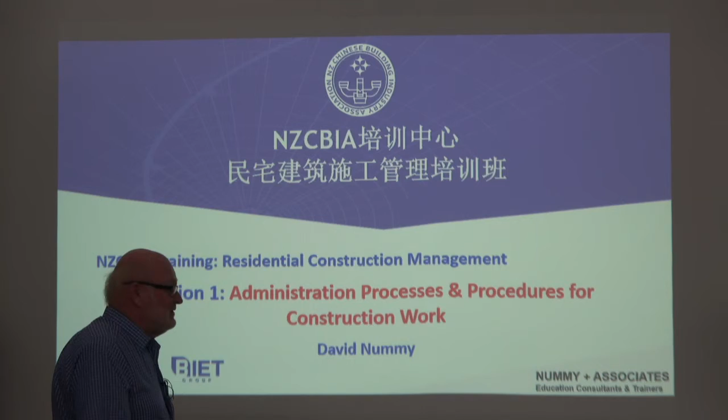So, administrative processes and procedures for construction work. These are the things that we will be going through today. We'll be looking at tendering, we'll be looking at contracts and standard conditions of contracts, the role of a schedule of quantities, and very quickly looking at some monitoring process. Those are the four key things that I will cover with you this afternoon.

I've got some terms up there already which I'm not certain whether you understand. A schedule of quantities - what does that mean? My background is an architect, Frank's an engineer, you know what those things are, you know what a builder does. Do you know what a quantity surveyor does?

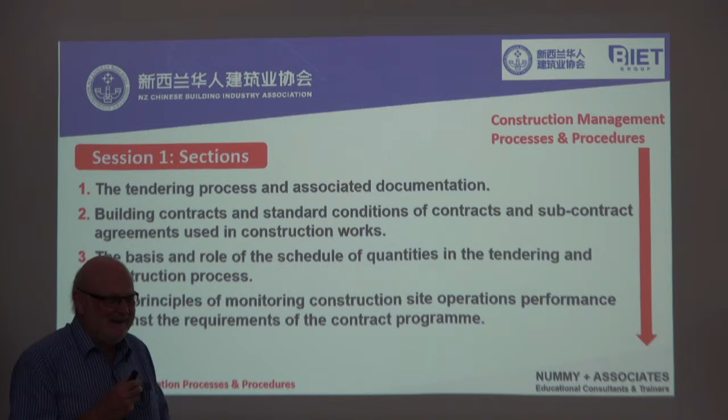Probably you do. In my role at Unitec, I used to visit schools and ask students who wants to be an architect - everyone puts up their hand. Who wants to be an engineer? Lots of people put up their hands. Who wants to be a quantity surveyor? No one puts up their hands. No one knows what a quantity surveyor does, though I know a quantity surveyor makes lots of money. But we will talk about the role of the quantity surveyor as well.

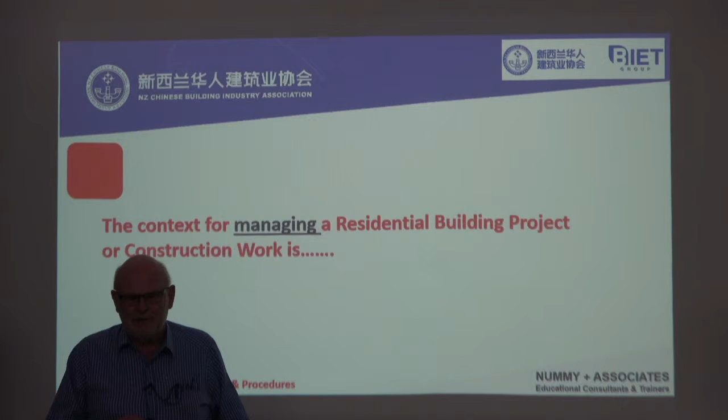So what is the context for managing a residential building project or construction work? I'm going to reinforce some of the things Frank has just said, but I'll do it slightly differently. I will talk about scope - what it is that we are building. That is at the key, at the centre of our context, the scope of work. You'll often hear people talk about the scope of work.

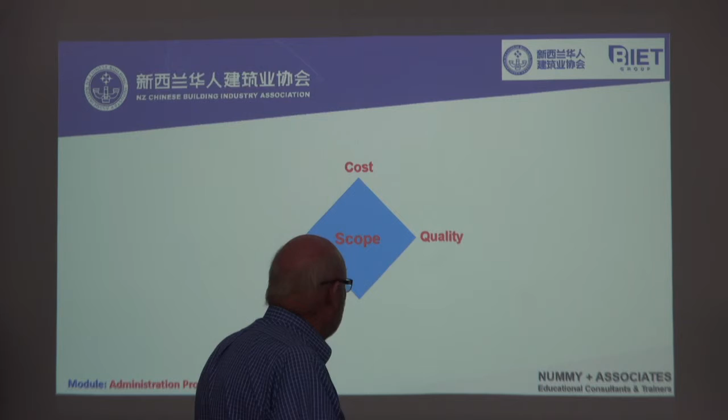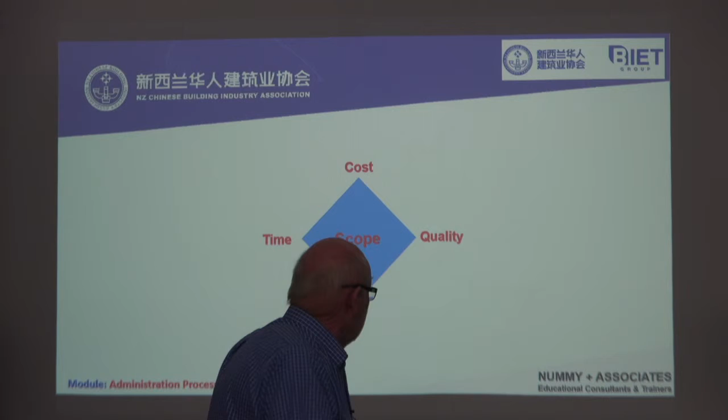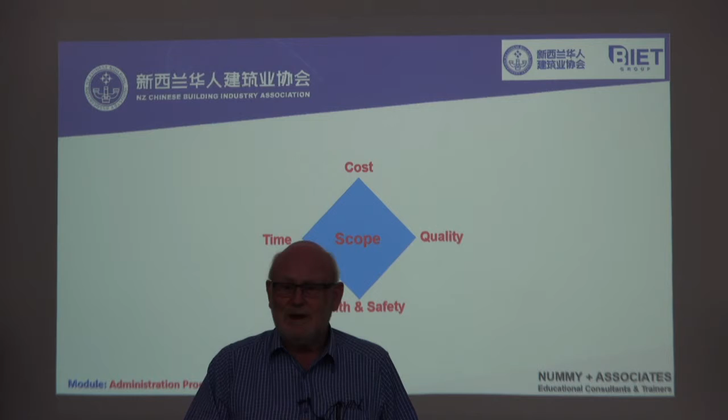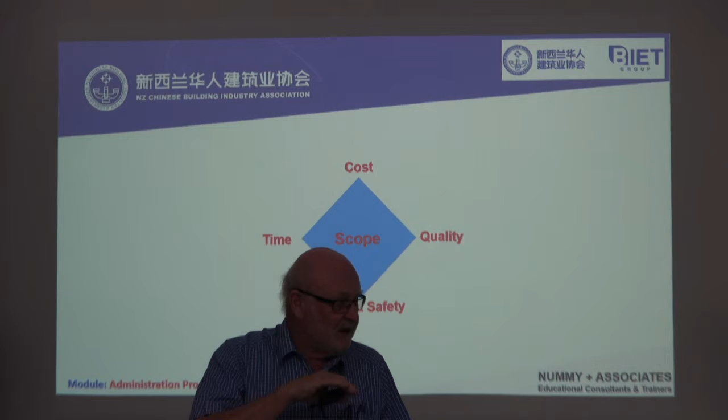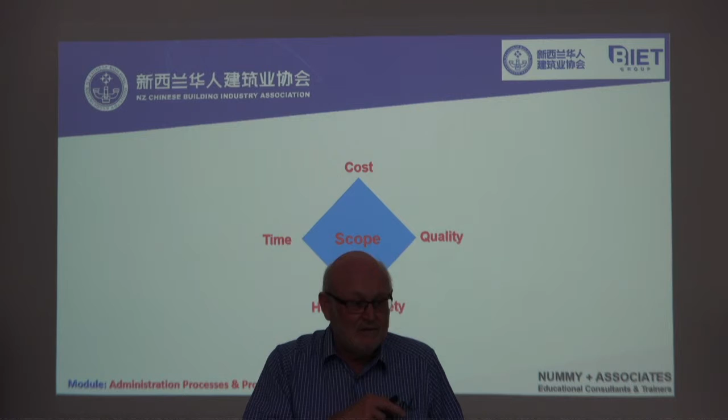Construction industry, particularly in New Zealand, is a dangerous place. Our accident rate within the construction industry is high, particularly in residential construction. In terms of workplace injury and death, the construction industry ranks with forestry and farming - in some years it is worse. New Zealand has a small population, just over 4 million people, half the size of one Chinese city. But in New Zealand, between 5 and 12 people will be killed in the construction industry every year. It's our responsibility to ensure that doesn't happen, and that we send the people who work for us home safely every day. That's a major responsibility that we have.

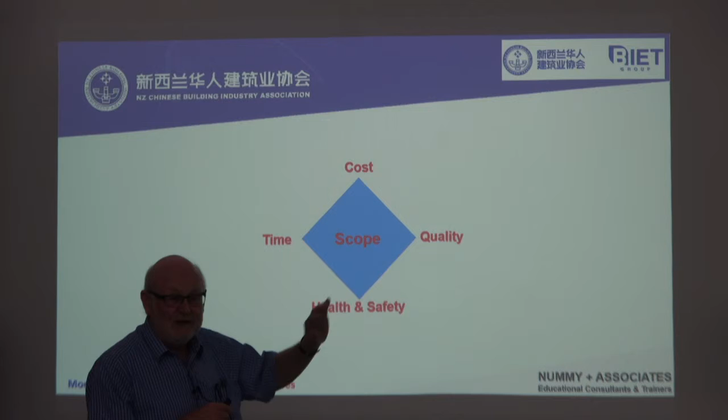So those are the 4 things we have to particularly focus on when managing construction projects: the cost, obviously, and the quality - the stated quality. When we talk about quality, it doesn't necessarily mean high quality, it means the quality that has been agreed. For example, if I bought a traditional car, a Rolls-Royce, that would be a different quality than if I bought a Toyota Corolla. They are both cars, but built to different quality standards, both built for the purpose they are manufactured for. So when we talk about quality, we're saying whatever the stated quality is that we have to achieve.

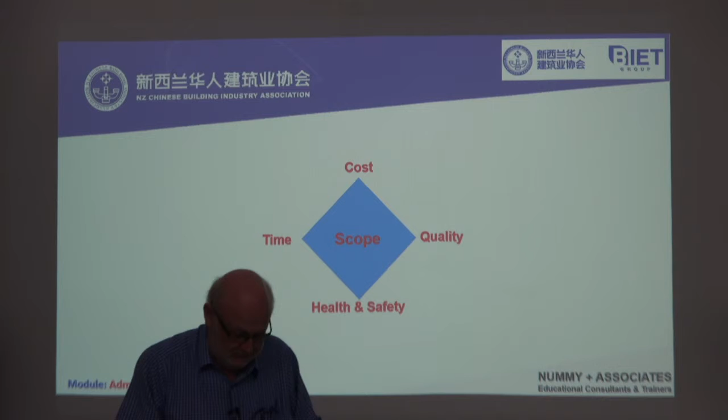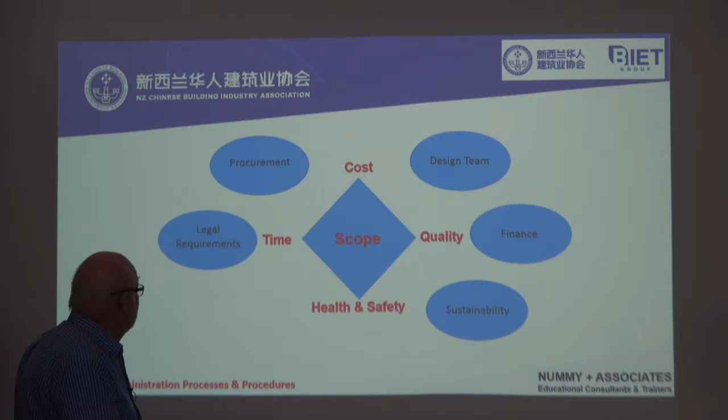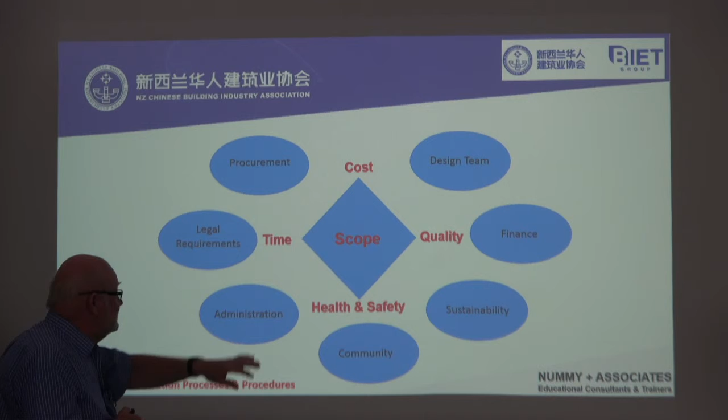Around these are the other things that impact the project - we have a design team, finance, sustainability, procurement, which is another word we'll talk about, legal requirements and administration. Those are the things that surround our project, and let's not forget the community. We don't build in isolation, so what we are doing will have an impact on our neighbours, on the community that we are in.

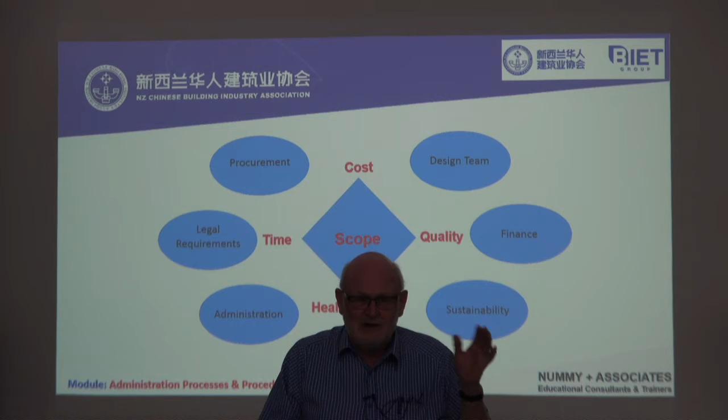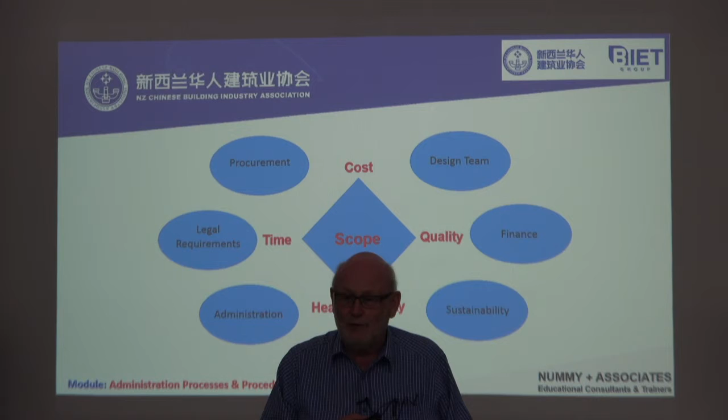And it depends on the project - it can be very, very important. For example, when Fletcher's built the latest stadium at Eden Park, there were no community complaints. They were constantly engaging with the community in the surrounding area to keep them informed, to protect their welfare, and so that the job was running smoothly.

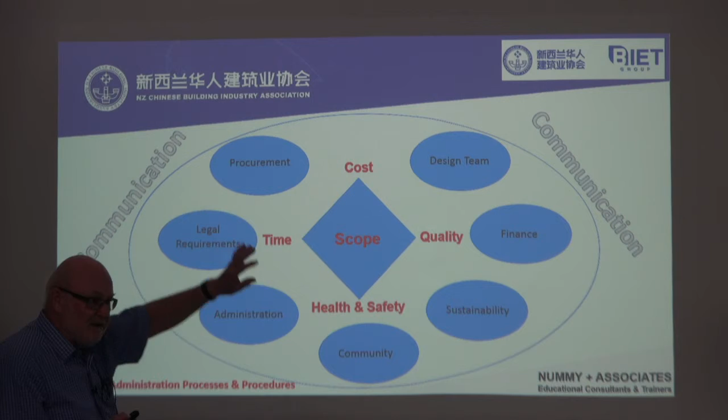And around the whole of that is good communication. So that's the context that we are working in. The scope of work - what has to be built, cost, time, quality, safety - and all of these other factors around the outside.

So Frank talked about this as well, but I'll reinforce it because it sets the context. Project scope - how do we know what it is that we are building? Project scope is defined by the drawings. The architect or engineer will produce the documents or drawings for the project, for your residential project. That is the fundamental definition of scope. We then have the specifications which describe the quality of the work that has to go in and the quality of the materials.

We may have some code compliance acceptable solutions also within the scope of works. Remember, you cannot contract out of New Zealand law, you cannot contract out of the construction regulations, which include compliance solutions. What is our contract? That defines the scope of work. What are the conditions of our contract? So we have an agreement and then we have conditions - there's two parts to it.

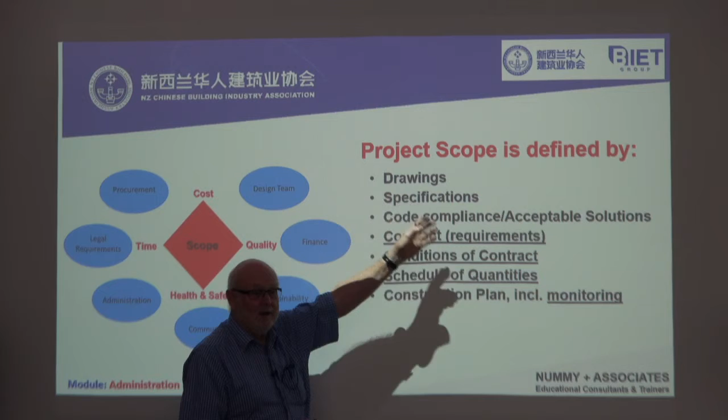There we are again - schedule of quantities may be part of the scope, and we may have a construction plan, which is your plan - that goes into the scope of work. So you take all of these things that may be prepared by consultants, but you put them into a construction plan. And often you will take your construction plan back to the client, back to the owner, because it's required in the conditions of contract to do so, and say, this is my plan, this is how we're going to build a building. So that becomes part of the definition of scope.

So Frank's going to introduce you to your case study assignment later this afternoon. Sorry - did he tell you there's homework?

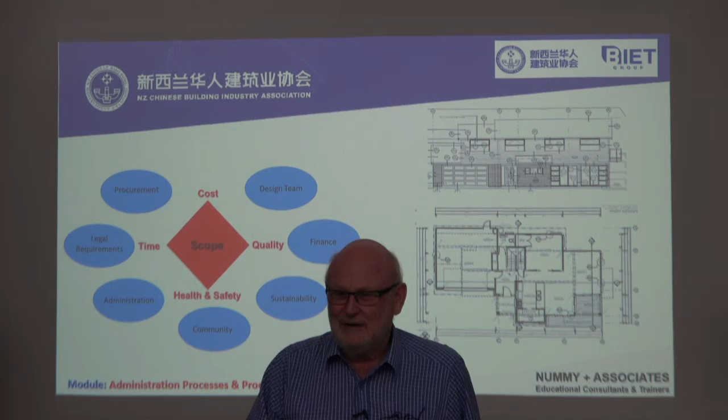So part of the learning you're going to do on this course is these sessions, when you're here. But just as important is the stuff that you will do together as a group, or by yourself. And so there will be a project that runs through the course, and it's a case study. So it's important that you engage in that work as well. That's called self-directed learning. So it's not just listening to me and all the other people that come here - you have to do some of this work yourself.

So you will have a set of drawings for your case study. However, what I'm saying is that there is a building there, and the drawings show what you have to build. They are part of the scope of works - they show you what you have to build.

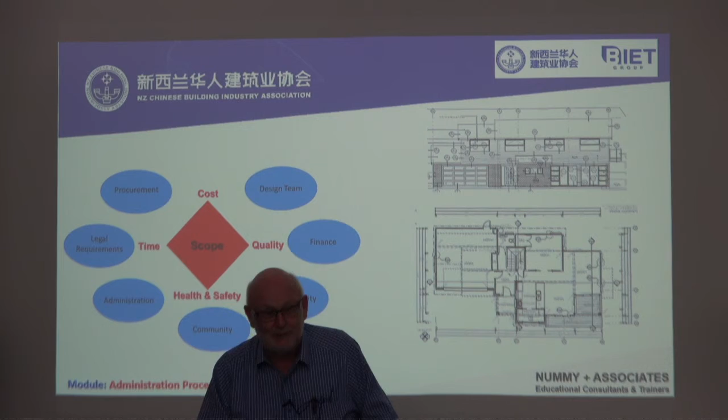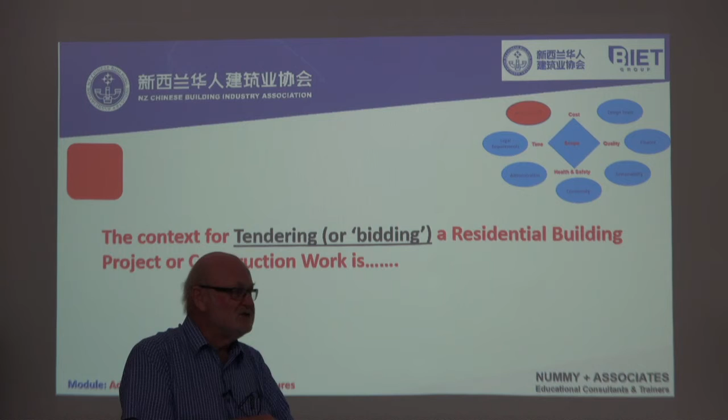So the first thing we have to look at today is tendering. In construction, or with any particular discipline, there is always a separate language - there are always technical terms that apply to that discipline or industry. So there's a whole range of terms and language that we use in construction. And if you talk to someone outside of construction, they don't understand what you're talking about. It's the same with any profession, any industry or vocation - there is a language used to describe what you do in that industry. So what we're introducing to you now is some technical terms specific to the construction industry. Tendering applies to other industries, but it is also important for construction. So what I'm trying to introduce now is, what is the context?

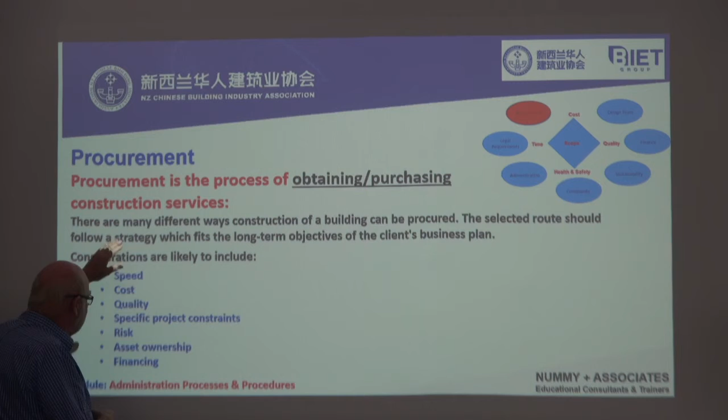So here's another word - procurement. Procurement is the process of obtaining or purchasing construction services, or anything else. This is how you obtain or purchase construction services - that's the general term for this process, procurement. And there are many different ways that the construction of a building can be procured. The selected route should follow a strategy which fits the objectives of the client, and they are likely to cover these things here. So you decide, how are we going to procure, or how are we going to tender this project?

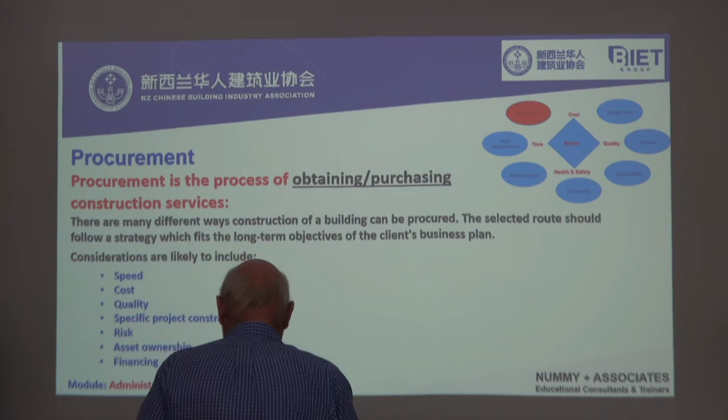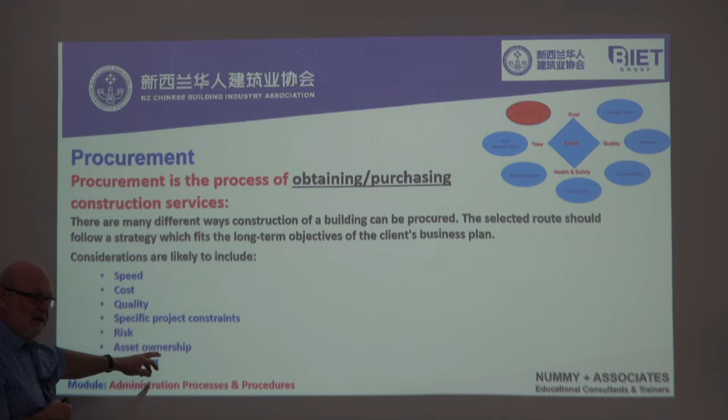Might be to do with the speed, how quickly we have to build it, what the cost is, what the quality is. There may be some specific constraints. What is the risk? How is the building going to be owned, and how is it going to be financed?

So in construction, when we're putting buildings together, there's risk. There's risk of cost escalation, there's design risk, there's financial risk, there's technical risk, there's construction risk. And if I am the owner, what I want to do is reduce my risk. I want to put all the risk onto you, because you are the contractor and you can take all the risk.

Okay, there are examples of this. I'll give you an example in a large building. Fletcher's, and Frank worked for Fletcher's. Fletcher's are currently building the convention centre, the big building in Hobson Street, owned by the casino. The convention centre was meant to open in July of this year. They are saying it will not be open until December. So there was the risk of time there. The project hasn't been completed.

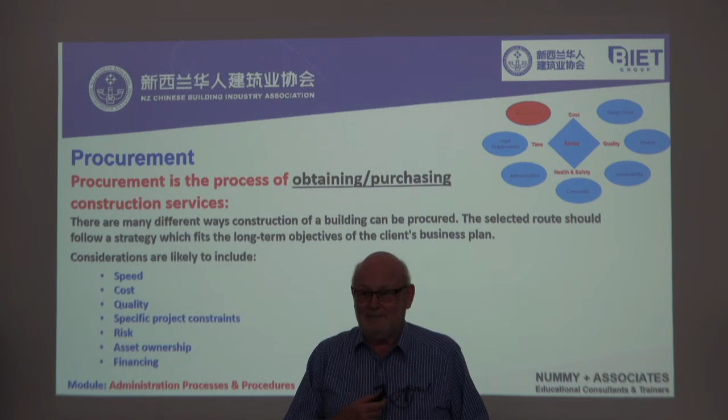So, the most common method for procuring a building is sometimes called a traditional method, but more technically correct, a lump sum method. A lump sum contract is the traditional means of procuring construction, and it's the most common form of contract.

So I have the plans for my house, and I ask how much to build it. You give me a figure to build. You will build my house for $1 million. Okay, we sign on it. We have a contract - that is called a lump sum contract. So it is a price that the contractor has offered to me as the client, and I have accepted. Offer and acceptance is a contract for $1 million. That is a lump sum contract.

And I've said here, generally when the project is well defined, when you have very, very good drawings and good documentation, that is an appropriate way of procuring or tendering a building, on a lump sum contract.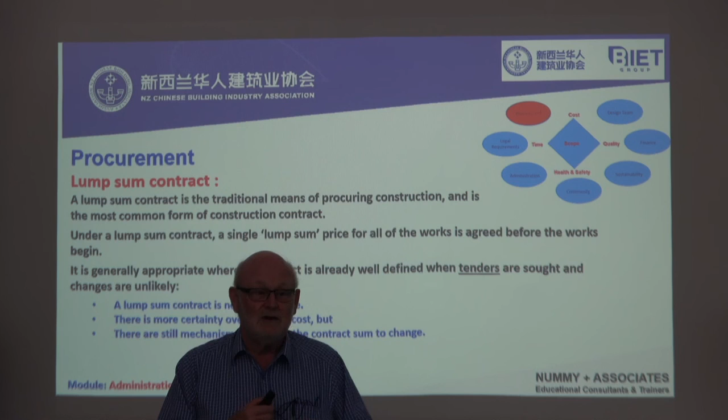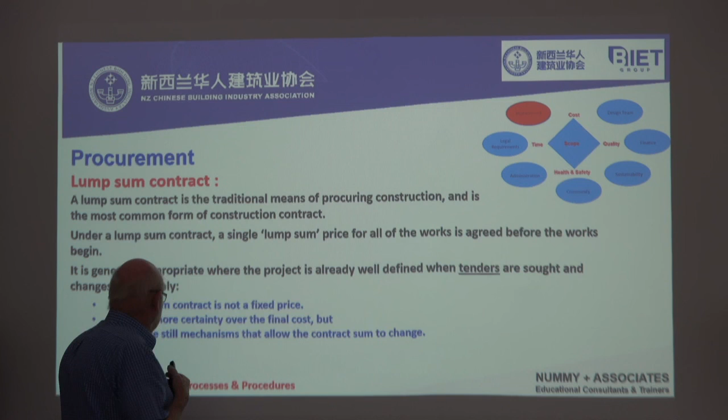But with a lump sum contract, you can claim increased costs. So it's a lump sum, but you can increase it. However, from a client's perspective, from my perspective, there's more certainty. I know what I'm up for, $1 million. And as I say, there's still mechanisms within that contract to change.

Shall we have a break? Yeah, good time.

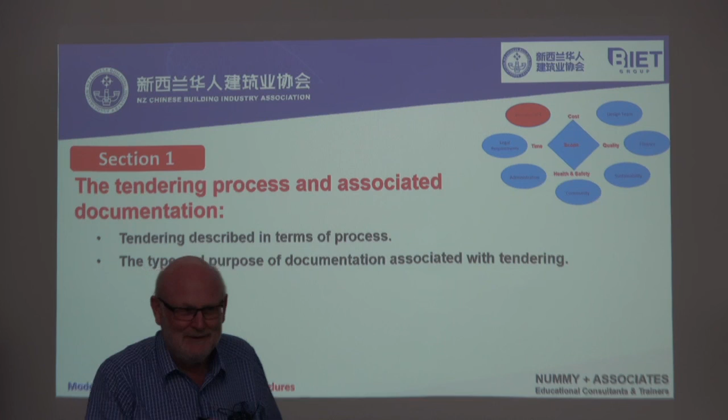We're now looking at tendering, and you've got notes in front of you now, so you can write on them. That's the idea of having the notes, and you can write on them, add things, because I won't necessarily just read what's on the screen.